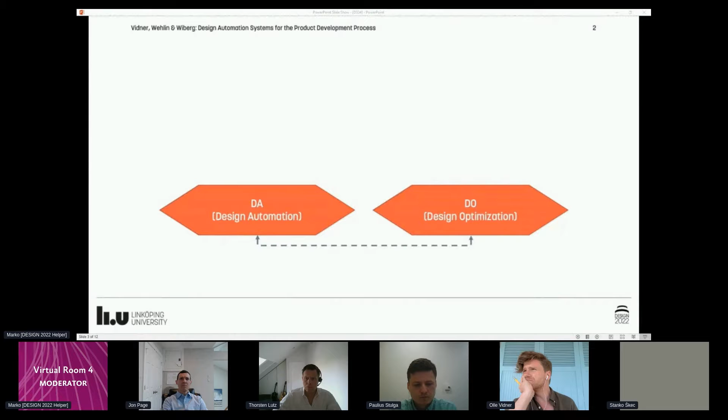Industrial product development processes are often iterative, with numerous interdependent and repetitive sub-processes. A common way of rationalizing this is by introducing design automation systems supported by design optimization to support parts of the process. An important aim for this work is to shed light onto the issues associated with the realization of DA systems. We believe this can aid future development by supplying more information about the traits of previously carried out projects. The cases presented give an opportunity to draw conclusions on recurring challenges that need to be handled in future development processes. As a result, the work summarizes issues which we believe should be considered in future research.

To fulfill our aims, we here cover the application of DA and DO onto 5 industrial cases of different character, as well as the lessons learned from developing these solutions. The cases are all gathered from previous research projects and share the property of being conducted in partnership with industrial companies working within the engineering of mechanical products. Each case will now be briefly presented.

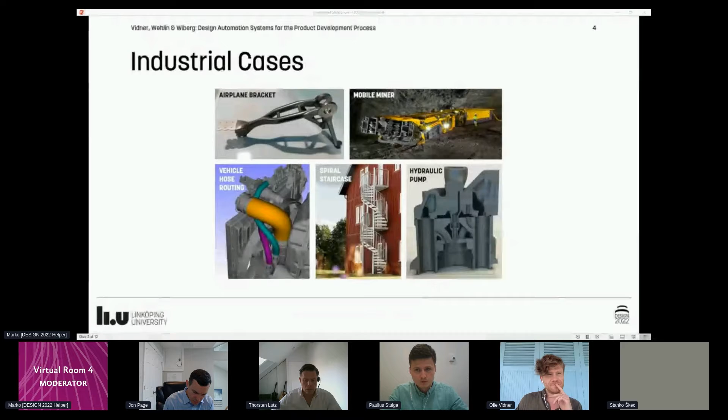First is the airplane bracket case, with the aim to enable configuration and optimization of component geometry for minimum weight and production cost by considering the structural integrity of the component, as well as its production process and associated cost simultaneously. The DA system for the airplane bracket is meant to support the product development process from the late conceptual stage all the way into the production stage.

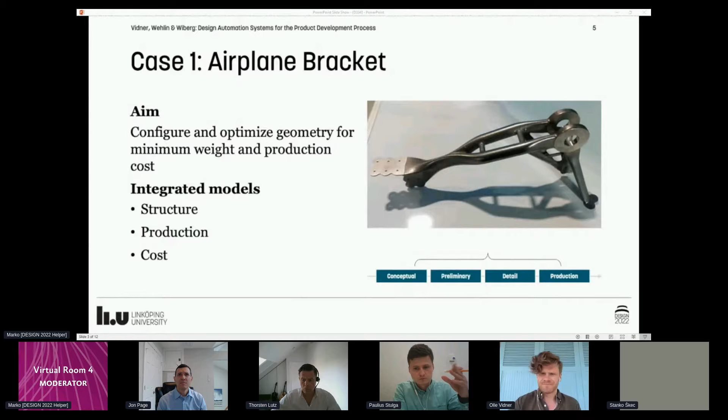Next is the mobile miner case, with the aim to automatically propose viable design configurations and quotations from user requirements in the early conceptual and preliminary development stages. The models integrated in the DA system consider the product's performance, structural integrity, consumable consumption, and its overall return on investment.

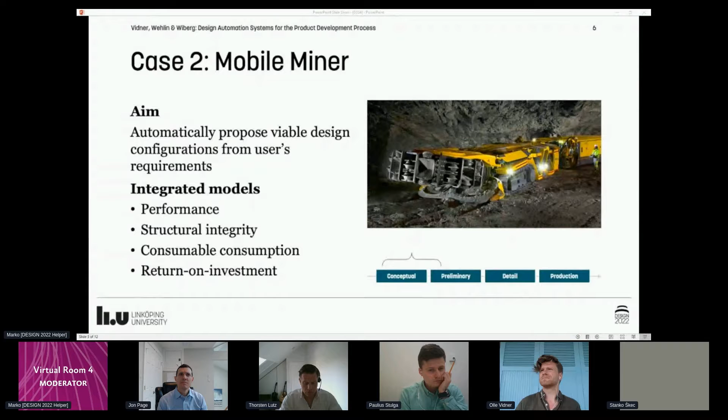Third, we have the vehicle hose routing system. Here, the aim is to generate conceptual solutions to hose routing problems subject to a large set of physical constraints. This in turn should be an enabler for fewer iterations between departments, mostly in the conceptual design stage. The DA system works by modeling the design's geometrical feasibility, material cost, and structural properties.

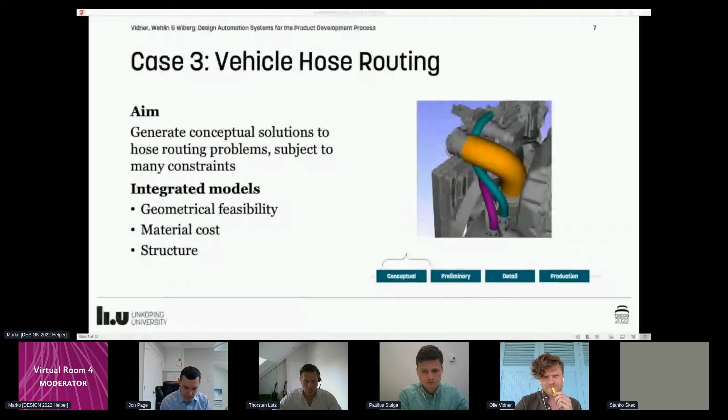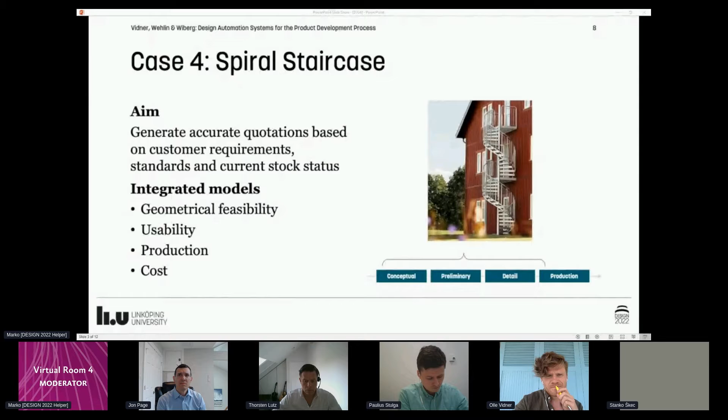Moving forward to the 4th case of spiral staircases, the aim is to rapidly generate accurate quotations based on customer requirements, standards, and current stock status. By integrating models for geometrical feasibility, usability, the production process, and costing, the DA system can support the product development process throughout the conceptual, preliminary, and detailed stages, leading into the early production planning stage.

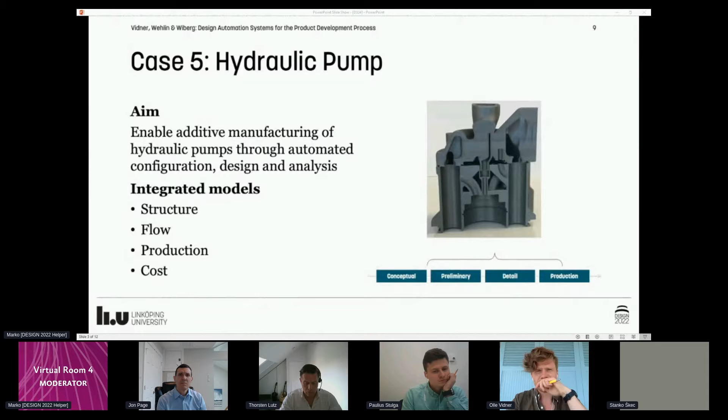Finally, the hydraulic pump case is focused on enabling additive manufacturing of hydraulic pumps through automated configuration, design, and analysis of structure, flow, production, and associated cost, all to support the process from preliminary to production development.

Both of these difficulties seem to indicate that the design paradox is fully at play when developing DA systems.

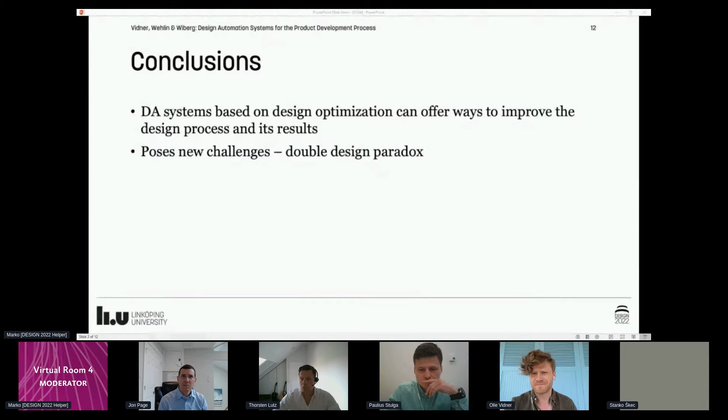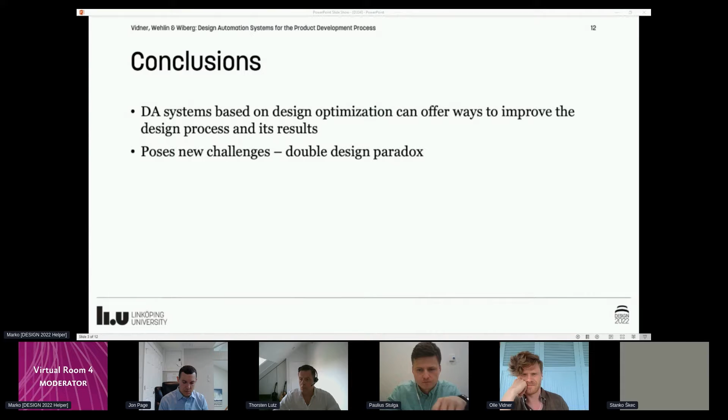Concluding the findings presented in our paper, we can see that DA systems can offer ways to improve the design process and its results. Developing DA systems in collaboration with academia and industry does, however, pose some new challenges, as DA developers are influenced by double design paradoxes, one for the DA development and one for the target product. Therefore, we see that flexibility and maintainability are key technical factors, and thus propose that further research should be conducted on rapidly reconfigurable modeling and optimization frameworks.

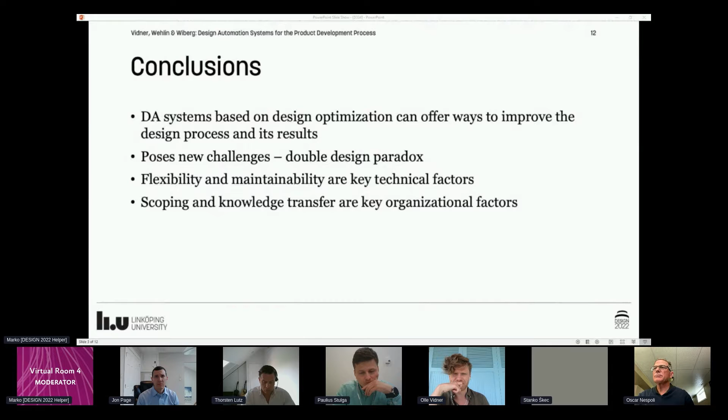From the organizational perspective, scoping and knowledge transfer are identified as key factors in a successful DA implementation. Finally, we would like to thank you for your attention and interest in our work.

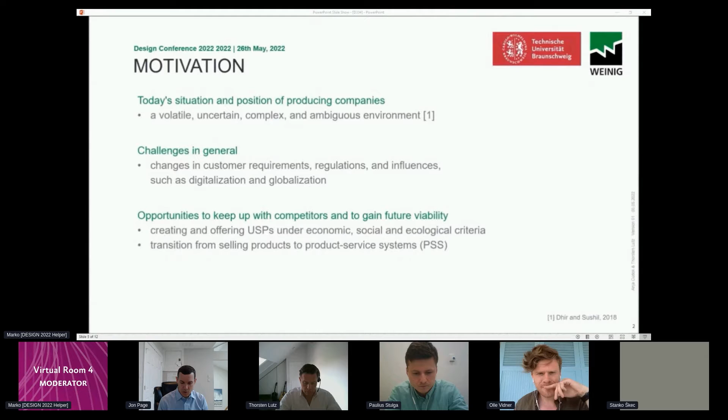According to Tischner and Tukker, PSS consists of both technical products and services. They are integrated to provide customer value over the system's entire lifecycle. Various models exist to describe and classify PSS, mostly agreeing on three categories differing in their shares of products and services: product-oriented, use-oriented, and result-oriented systems. It is stated that manufacturing companies change from offering products to PSS to increase revenues and profitability, but also to achieve environmental benefits.

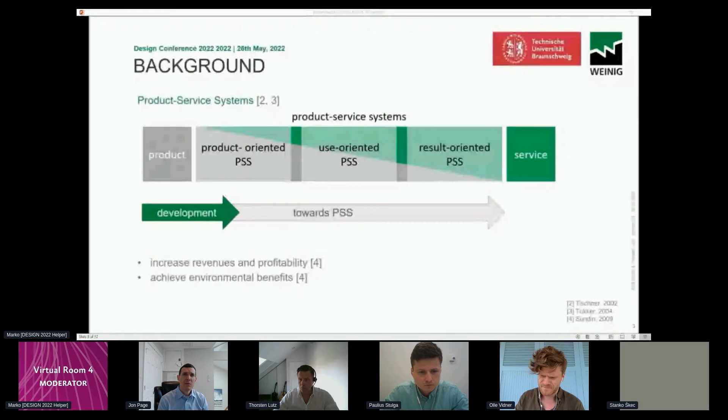Let's have a look at our company, the Weinig Group, as it sets the example for implementing our PSS transformation workshop. The Weinig Group is the world's market leader when it comes to processing machines for solid wood.

The portfolio of the group includes processes like sawing, planing, profiling, pressing, scanning, and finger jointing, and offers standalone as well as large volume machines and industrial production lines. From small timber dimensions, for example for furniture construction, up to large dimensions for heavy construction timber, a huge variety of parameters can be covered.

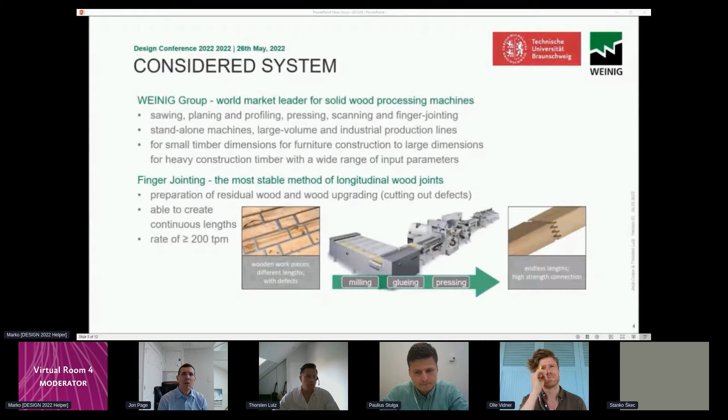We are now taking a closer look at the finger jointing technology that we have worked on within the workshop. Finger jointing is a wood processing method to produce the most stable longitudinal wood joints, and is one of the central processes in solid wood processing, both for the preparation of residual wood and wood upgrading. It enables the creation of continuous lengths to produce defined workpiece lengths in downstream processes, and furthermore, workpieces from which defects are cut out can subsequently be joined to form a defect-free workpiece.

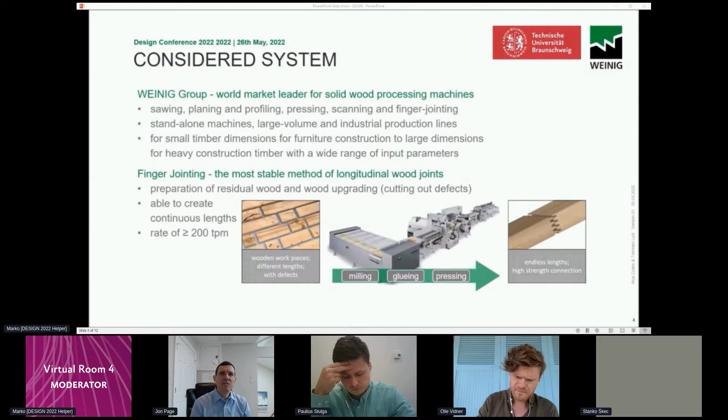The whole idea for a workshop concerning PSS came up within another research project that had aimed at connecting SMEs and research institutes. The Institute for Engineering Design had presented their current research, and the topic of transformation from manufacturing companies to service providers was the crucial topic for initiating the bilateral collaboration with the Weinig Group, as it matched the company's needs and showed several approaches for a necessary transformation process towards PSS in order to secure its future viability.

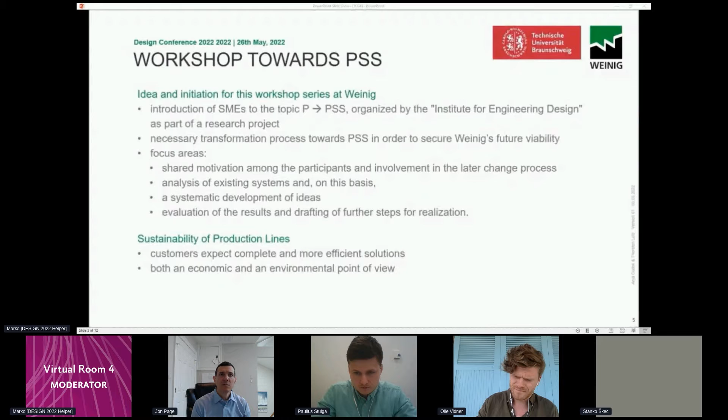The workshop series included the following points: a shared motivation among the participants and involvement in the later change process should be achieved. An analysis and a common understanding of existing systems and challenges needed to be worked out as a basis for a systematic development of conceptual ideas, as well as the evaluation of the results and drafting of further steps for realization.

In the conception of the workshop, we decided on 5 sections that are distinct from each other. First, the goal definition to reach a shared understanding of the situation and aims, and to motivate the participants for the workshop and the transformation process. Secondly, a system analysis to build a shared foundation of knowledge and impressions of the system under design.

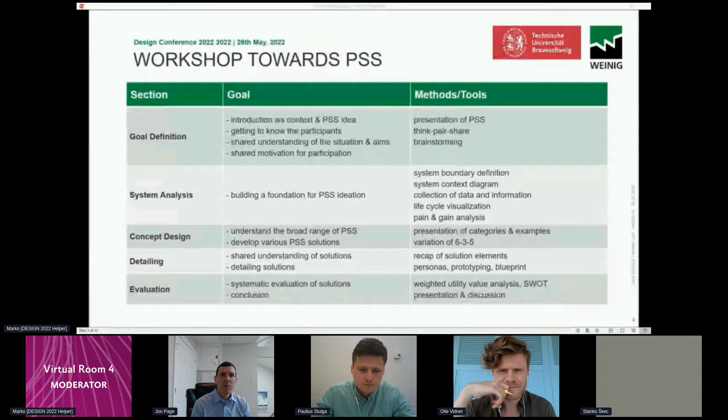Then we went on into the conceptual design phase to develop first basic concepts that were then detailed into solutions that could be evaluated within the last step.

The desired concepts are expected to concern several subsystems and departments from the company, such as product and software engineering, service, and innovation management. The participants were chosen accordingly. They enabled a good overview of the product and its life cycle, and to include further internal stakeholders.

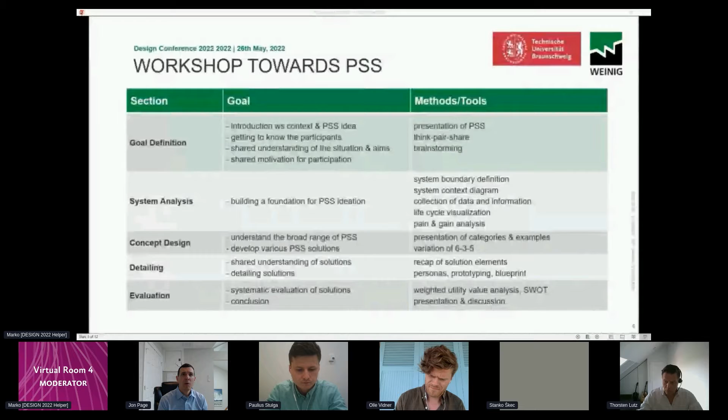I would like to mention some examples, such as system context diagram, life cycle visualization, and pain and gain analysis in the analysis phase, and personas and prototyping within detailing the concepts. Within 3 workshop days, we were able to work in a positive and focused atmosphere and derive a shared understanding and aim for all participants.

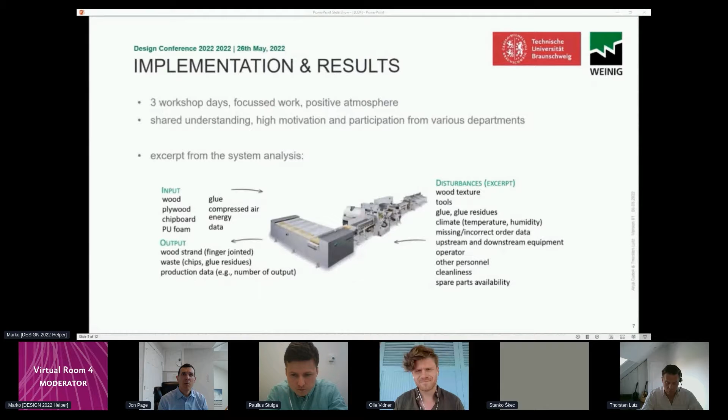We just want to give you an overview of our results. For example, we were able to derive inputs and outputs, as well as disturbing factors for the finger jointing production line. These factors were later used in the process as starting points for concepts.

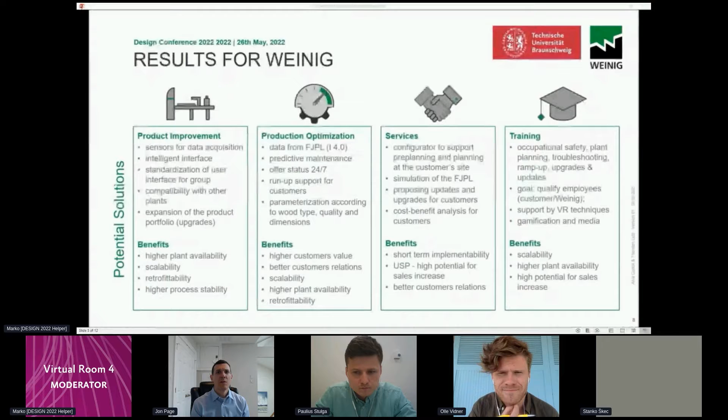For the product itself, it is intended to integrate sensors for data acquisition and interpretation in order to generate added value for both the customer and Weinig. Customer-oriented services like a configuration tool and the proposition of updates and upgrades for existing production lines would build better customer relations and give Weinig more control over the system's lifecycle.

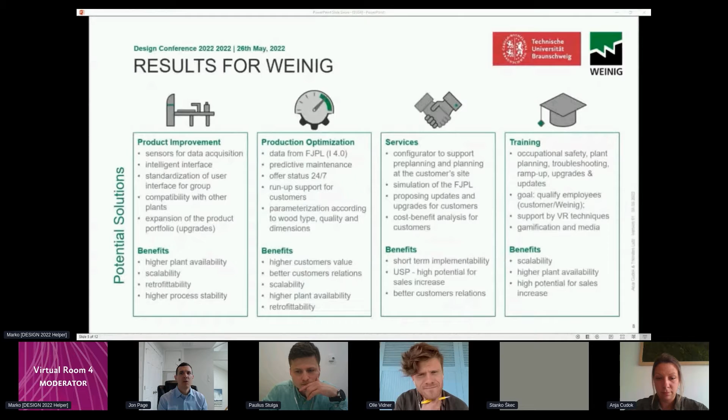To sum it all up, let's have a look at both the workshop concept and the impact for the company after its implementation. We can say that we have developed a successful workshop concept that revealed high potential for product service systems within the broad categories of product, production, service, trainings, and related business models.

The workshop concept is generic and easy to transfer to other companies or branches. In addition, methods can be adapted to other teams, departments, or sizes, and methods could be exchanged or expanded.

Taking a look at Weinig, the concepts found are a very good starting point for the transformation towards PSS. Further actions now need to be the organizational orientation and severe commitment towards the transformation.

The effort for planning of the implementation might be high, but for several concepts, the effort for realization is seen as low and manageable. The next step will be to define resources, the structure, division of labor, and to develop necessary competencies suitable for the favored concepts.

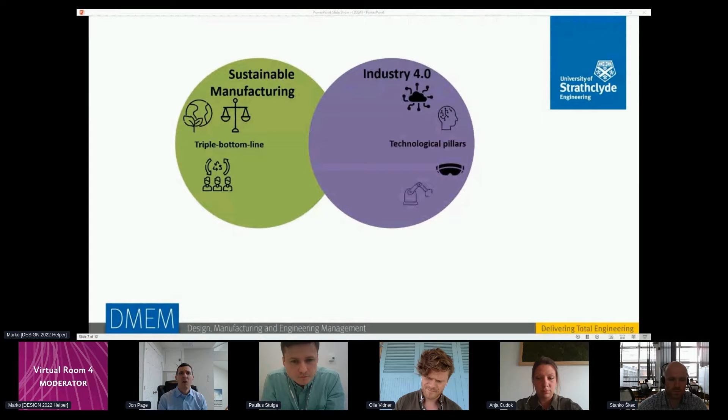What is interesting about these two research areas is that we could see a new emerging research area in the past few years where Industry 4.0 took a more active role towards enabling sustainable manufacturing. So we took this knowledge and decided to take a deeper look into the textile industry, which is being observed through a sort of a sustainability lens by the consumers as well as the government.

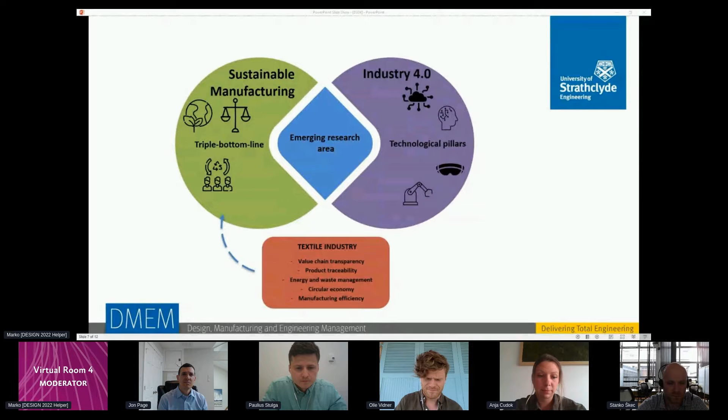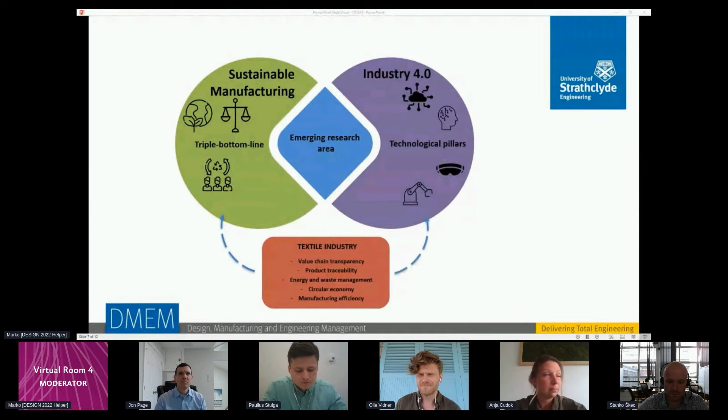Some of the main areas of concern are found to be value chain transparency and product traceability, energy and waste management, capability for implementing circular economy, and manufacturing efficiency. Most importantly, we wanted to see to what extent the textile industry has been using Industry 4.0 to enable sustainable manufacturing.

So we started by collecting data to see what the state of the art within this industry was. We found that most of the academic contributions are on a conceptual level. The industry surveys show that most of the respondents from the textile manufacturing sector lack the general knowledge and readiness for Industry 4.0 adoption.

There are some cases that show effective uses of Industry 4.0, especially with technologies such as the Internet of Things and cloud computing, which are shown to have a bigger impact for supply chain management and product traceability. It is also worth mentioning that the commercial market for Industry 4.0 related technologies for the textile industry is quite active in terms of new and innovative products.

So the gap that we found is that in its current state, the textile industry has a low adoption rate of Industry 4.0. Some awareness exists towards the benefits and implementation guidance, but it is not actively used. So the general outlook is that the manufacturers are at an exploration stage. The textile industry lags behind other industries in terms of Industry 4.0 adoption, which can have a negative impact towards adopting sustainable manufacturing as well.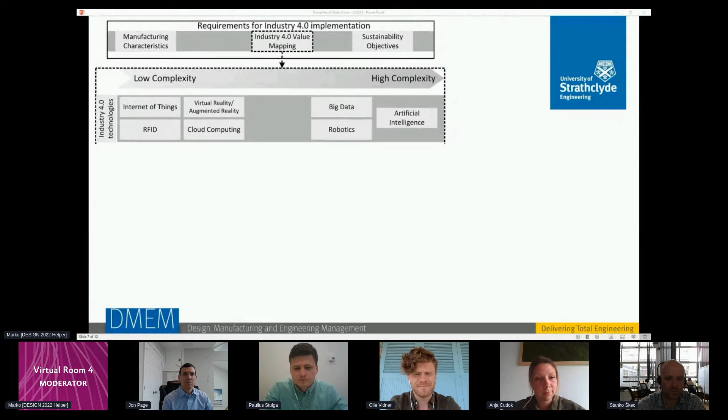And lastly, the Industry 4.0 value mapping, which is extended into the second step of this framework, where we map out the Industry 4.0 technologies found to be used in textiles manufacturing, as well as mapping out Industry 4.0 applications found to be used in textiles manufacturing.

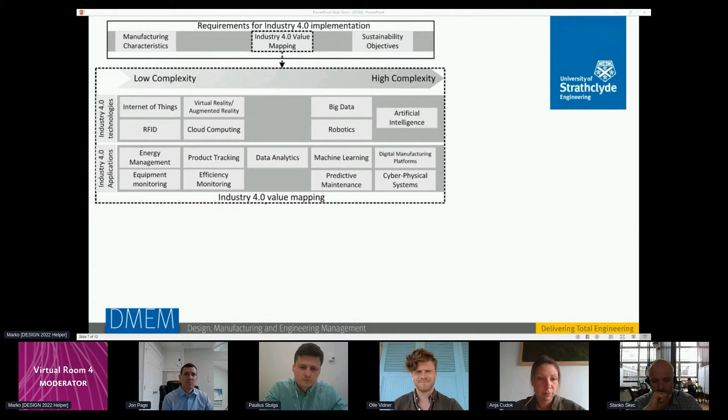The purpose of this is to accomplish step 3, which is to create a ranking of relevance of certain technologies and applications. Finally, step 4 requires a selection of available technologies and services that will best fit the requirements defined in step 1.

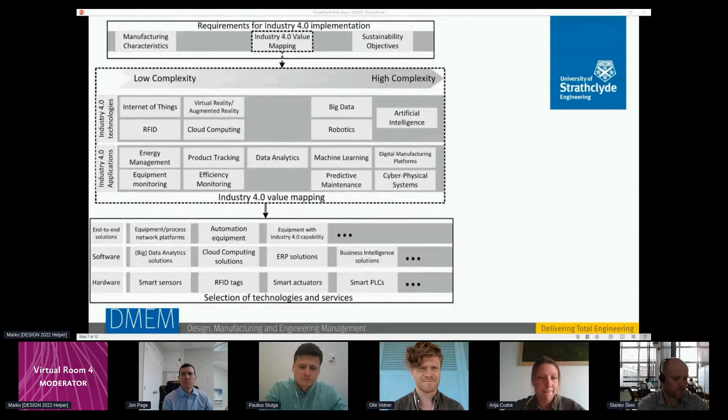In simple words, the framework intends to channel different groups of companies that have similar characteristics and objectives towards certain Industry 4.0 technologies and applications.

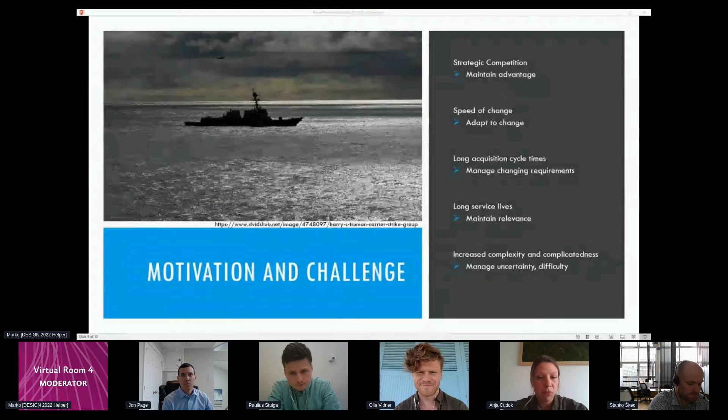Therefore, when we set out to design a new large surface combatant, now known as DDGX, we took lessons from Toyota's performance in their global competition and applied what we could for a naval vessel design. We decided to use a set-based design method to evolve our knowledge and address the complexity of the design.

We decided another key effort was to incorporate flexibility to address uncertainty and value sustainment and give future leaders affordable and efficient options. Part of our predicament, though, was not having many examples to use in establishing these methods, especially at this scale.

Therefore, we had to use the method as we designed and modified it. This invoked participatory action research, where the researcher is actively involved in change mechanisms for a group of people. It framed the efforts for us to prepare, act, and reflect on the people and processes conducting set-based design in situ.

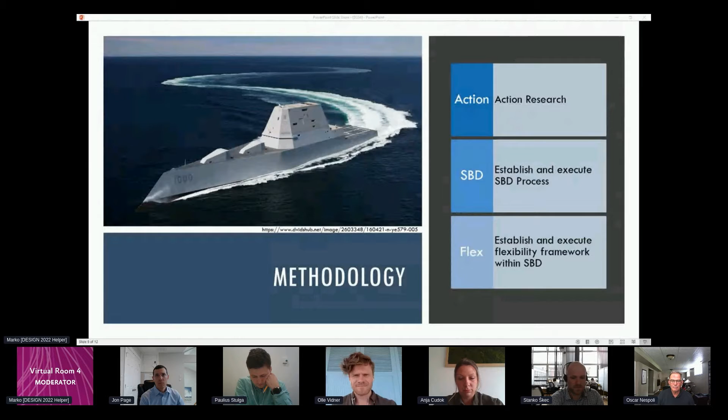Our instance of set-based design has four main parts. The first is the philosophy we put behind it. Our basic design philosophy was to rapidly develop an affordable and flexible ship class that will potentially serve the Navy into the next century.

We shared how to execute this philosophy through design guidance memoranda. One can see the philosophy coming through just in the titles, each of them managing risks and communicating policy in their own way.

For the team organization, we chose a hub and spoke model for a few reasons. First, it matched reasonably well with our existing parent organization, Naval Sea Systems Command. Second, it helped us manage the teams and cross-domain communications.

At first, all communications came through us at the hub. We did not allow cross-domain communications. The team was small, and this was manageable.

But after about a year, the sets were developed, the team had grown, and we were mentoring on some of the same issues with each domain. So we expanded and conducted set reviews with every domain present instead of just one. This enabled the entire team to train and mentor and learn collectively. Third, it allowed the team to scale and grow appropriately.

We expanded the hub, the spokes, and the whole team together, and we can see that the underlying structure remained as the team expanded. For the process, set reviews were the structured meeting for decisions, intersections, and communications. They reviewed the information in an established format with the senior ship design manager to get a decision. Each set review was like an experiment in our test rig of the process.

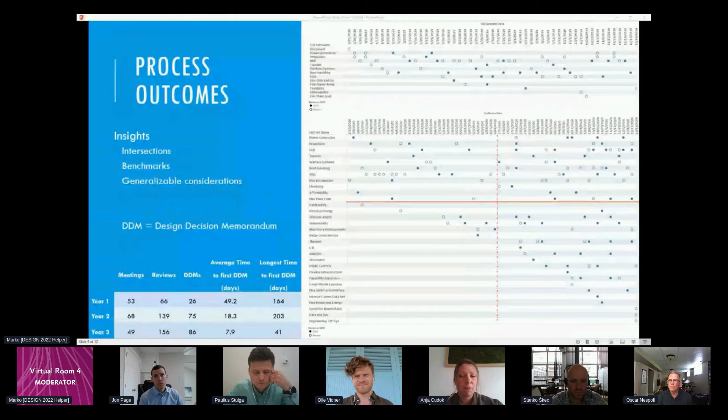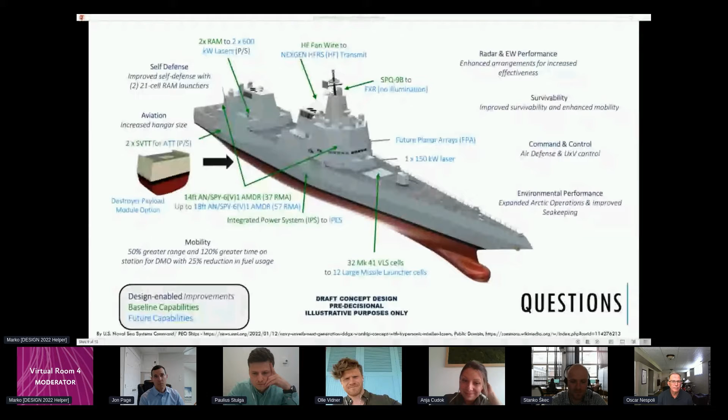In conclusion, we established a process and team structure that scaled set-based design up to a system of systems. We look forward to set-based design's continued expansion and use, including transferring the practice to other ship classes and other decision processes. We have many lessons learned we are happy to share. Of note, this is not the ship, but represents what it could be.

Thank you very much. Great.

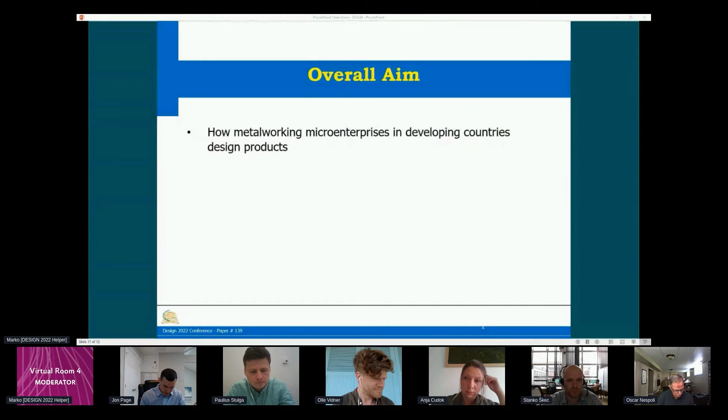So these are the research questions that we attempted to answer in this research. How informal metalworking microenterprises identify consumer needs and requirements, and how do they generate and evaluate alternative concepts.

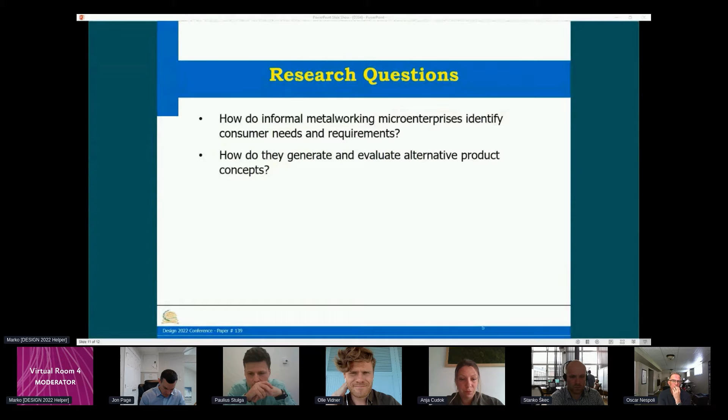And the methodology we followed can be described as follows. Semi-structured interviews were carried out in 10 informal micro-enterprises in Dar es Salaam and coast regions of Tanzania. And the interviewed informal enterprises produce a wide range of products such as furniture, window grills, doors, charcoal stove, and so forth.

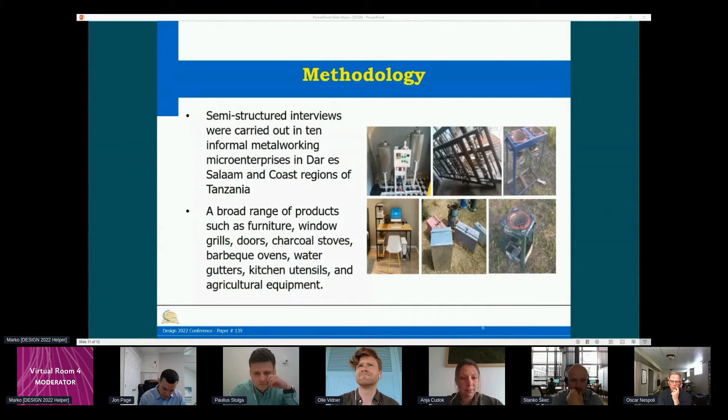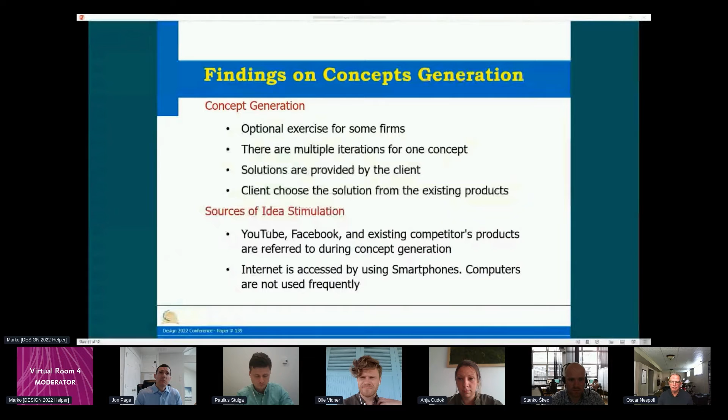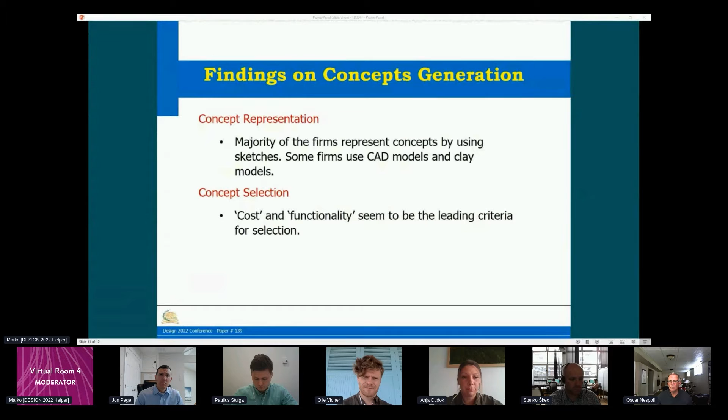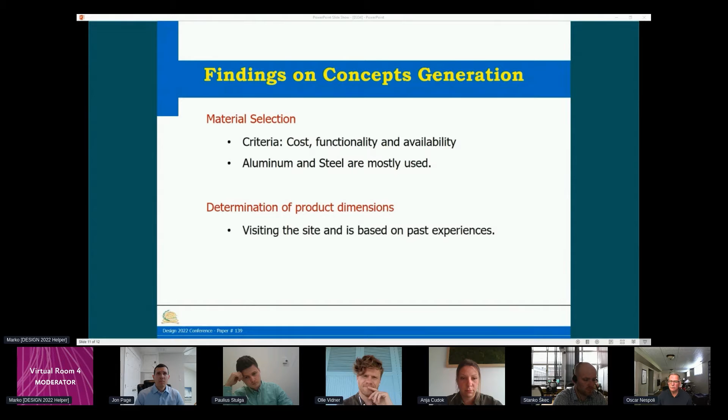On material selection, it has been found that criteria used for selection are cost, functionality, and availability, and aluminum and steel are mostly used. In determination of product dimensions, it has been found that this typically entails visiting the sites and is based on past experiences.

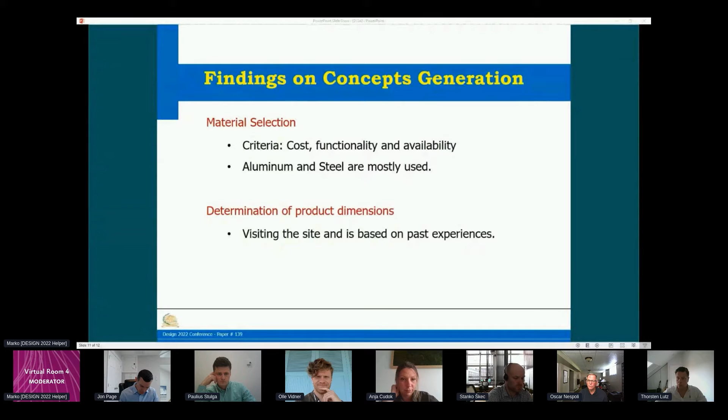We have investigated how informal metalworking microenterprises in developing countries design products, and undertook an empirical study in Tanzania. We have seen how informal metalworking enterprises identify customer needs and requirements and how they generate and evaluate alternative concepts. This concludes this presentation, and thank you for your attention.

Okay, great. Thank you very much. So thank you to all presenters. I think that we've seen some very, very nice, interesting new insights. Some of them, I think it's really interesting how they try to transfer theoretical findings from academia to industrial settings, which is often neglected and followed by several issues, which some of these papers clearly stated.

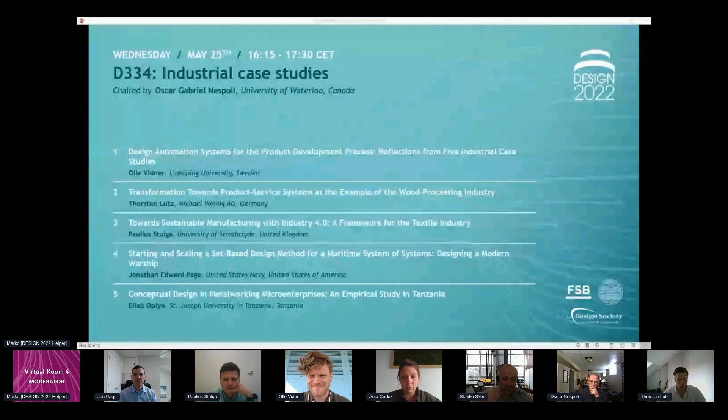Great job, thank you. Thank you. Thanks, guys. Bye-bye. See you, see you.